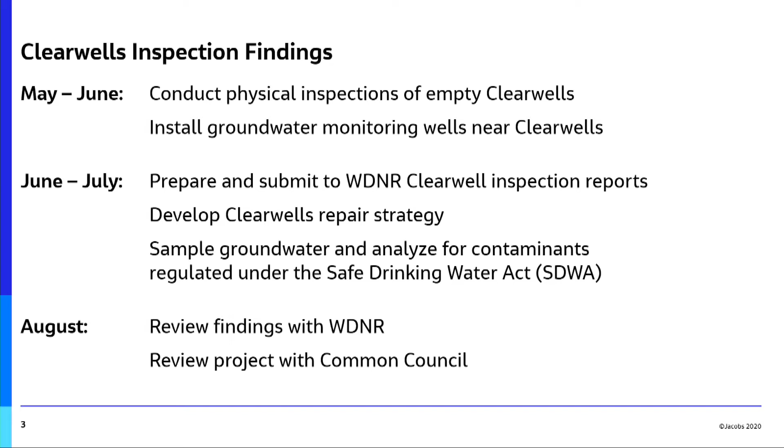So in the early summer, spring, we were conducting those inspections and installing groundwater monitoring wells near the Clearwell. In June and July, we submitted the inspection reports, and we collaborated with Dixon on what would be feasible repair strategies and rehabilitation approaches for the Clearwells to extend their service life. The water utility staff at the treatment plant collected groundwater samples and had them analyzed for many compounds that are regulated under the Safe Drinking Water Act. And then in August, earlier this month, we reviewed those findings with the DNR, and we're here with you this evening.

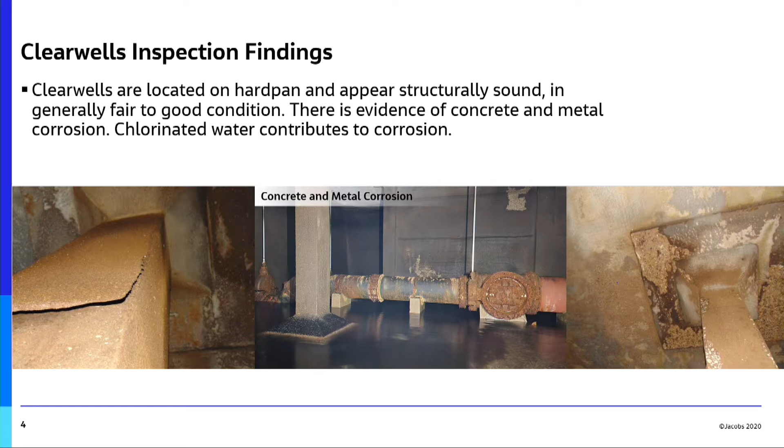So, Clearwell inspection findings. The Clearwells, as you know, are partially buried water storage tanks. They were constructed on a rock-like formation, commonly referred to as hardpan in town, and that provides a very good structural foundation for these tanks, and is probably one of the reasons why they are in fair to good shape, even the really old structures. These photographs show the kind of corrosion that is evident on the concrete and metal surfaces in the Clearwell. This kind of corrosion is not uncommon when these materials are exposed for many years to chlorinated water.

Previously, plant staff guess it might have been somewhere around the 1960s, the Clearwells were relined with a material called shotcrete, which is a cementitious lining. A lot of that lining is in poor condition. Parts of it have fallen away and been removed. Parts still remaining on surfaces are damp in areas, which indicates there are cracks or leaks that could be masked behind that lining. So we put together cost estimates to remove this material and repair these cracks, but had to make an expert guess on what would be involved, because not every surface was available for us to inspect.

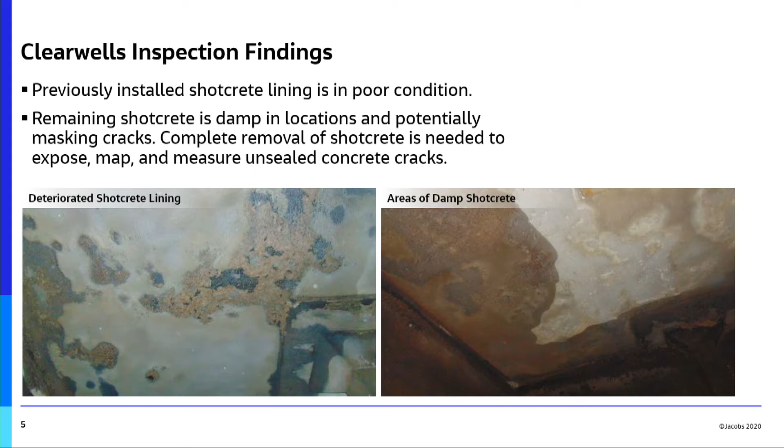Some of the concrete surfaces are soft, a little spongy in nature. That too is not unusual for concrete tanks that have stored chlorinated water for a long time. It's not an appropriate material to build upon, so we would have to remove that before we put any kind of repair lining on. The water storage tanks have pipelines that convey water into and out of the tanks, and these wall pipe penetrations leak, some more actively than others. The photograph on the lower right shows a wall pipe penetration that has been previously repaired. That lighter color concrete indicates where the wall had been cut away and the wall pipe replaced. At this location, there was an active water leak.

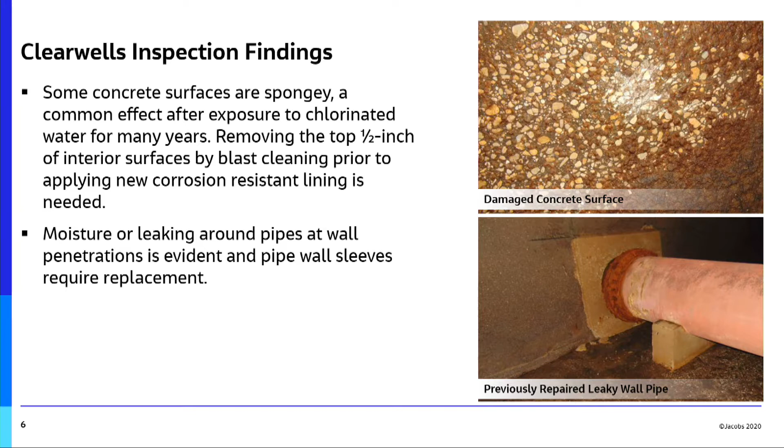There were active leaks visible, photographed, videoed in both the north and center clear wells. And as a result of these detected active leaks, the city has changed how they're operating the clear wells so that the surface water elevation of the stored drinking water is always above the water table.

And what that means is there is a positive head, a higher potential energy, so that if water is going to flow through a crack in these walls, it's going to flow from the inside of the tank to the outside of the tank. As opposed to when they were empty, like these photographs, there was no pressure keeping that groundwater back, and the groundwater flowed in these locations.

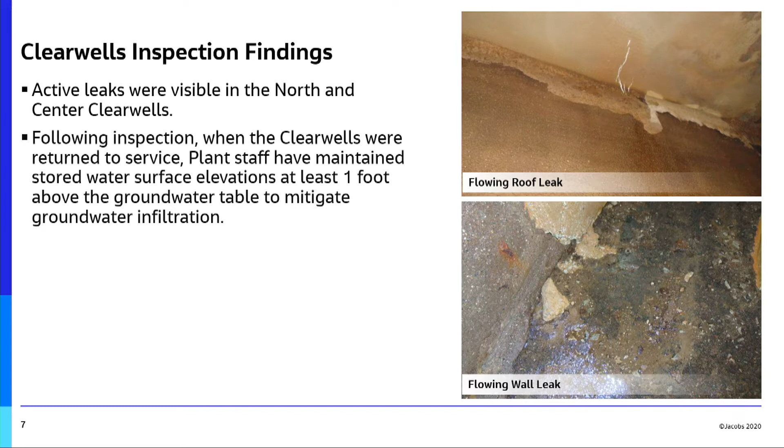All right, in the spring, with the help of AECOM, there were 2 groundwater sampling wells installed at the filter plant site, one east of the clear wells, one west of the clear wells. They were installed of all PFAS-free materials of construction. And this summer, 3 rounds of samples were collected for over 170 Safe Drinking Water Act regulated contaminants. These included microorganisms, disinfectants, chemicals, organic and inorganic, radionuclides, PFAS compounds, and other water quality parameters.

Of the PFAS results, there were 20 different compounds measured, and the majority, like 90% of the results for PFAS in the groundwater next to the clear wells, not in the drinking water, but in the groundwater, about 90% of those results are below the detection limit. So the sample result comes back ND, non-detect.

And then for about 10% of the compounds tested, there were results that came back with brackets around them, very, very low numbers. The brackets were a way for the laboratory to communicate that they had uncertainty about the measurements. They thought the parameter was there above the non-detect level, but below what the laboratory professionals call the level of quantitation. So they reported a number extremely low, a lot of uncertainty. So not a contaminant of concern in the groundwater at this location based on 3 rounds of samples.

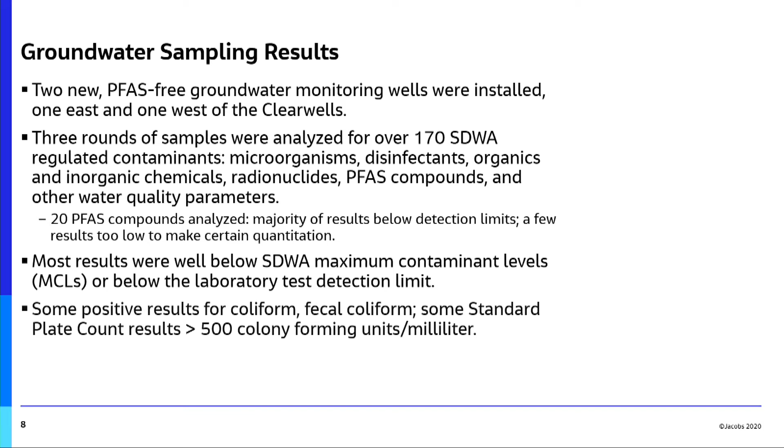Okay, so we collected all of this information and met with DNR. And this slide is one that I've reviewed with DNR to confirm that we are expressing their guidance accurately. So, a buried clear well is a buried water storage tank that's located below the groundwater table and below the floodplain. And if your buried clear well is watertight, it still does not comply with NR 811.

So, if a buried clear well is watertight, how the DNR will respond is they will permit operation of a non-compliant tank as long as the operators of that tank undertake additional safeguards. One thing they specifically mentioned was frequent inspections, dry clear well inspections.

Real quick, is ours considered watertight? No. Didn't think so. Active leaks, no. Before the Oshkosh clear well test was done, there could have been, I assume. She's not going that far. As Linda works down the table, our situation falls under the last row. Linda is just kind of describing the various opportunities, but we fall under the last row right now.

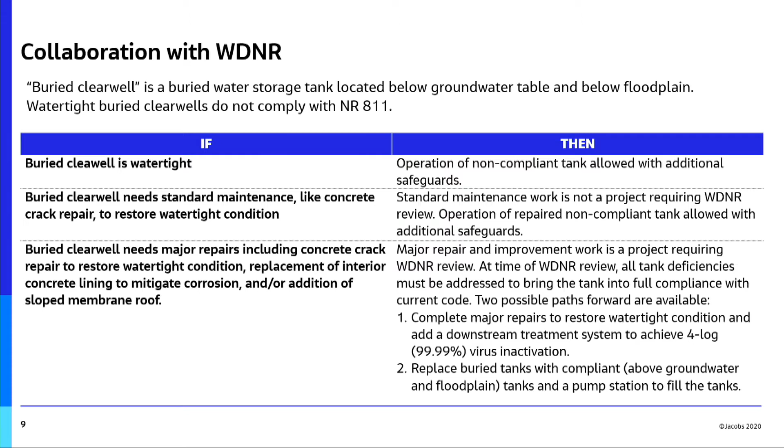Thank you. There's more to come with that. The other part of that question, that's a loaded question, even as basic as it was, because as Linda will show you, there's more to it than just can it be done, but at what cost? Okay, so moving on, we're going to have 2 or 3 slides talking about what does repair and rehabilitate the clear wells mean, what would that project look like with the additional treatment barrier, and then we'll touch back on what were our project options last fall and in the winter with at-grade reservoirs and pump stations.

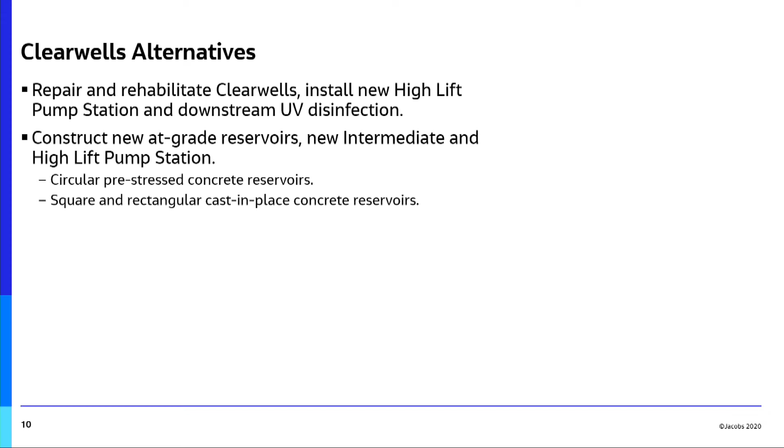So, to repair and rehabilitate the clear wells and meet several of the current deficiencies, the interior surfaces would be blast cleaned so that the surfaces could be relined with shotcrete. The wall pipe penetrations would need to be repaired or replaced to restore water tightness. And clear well overflow pipes need to be added to each clear well to permit the free discharge of overflowing water from the storage tank. Your other storage tanks in the city, your water towers, for example, all have overflow pipes.

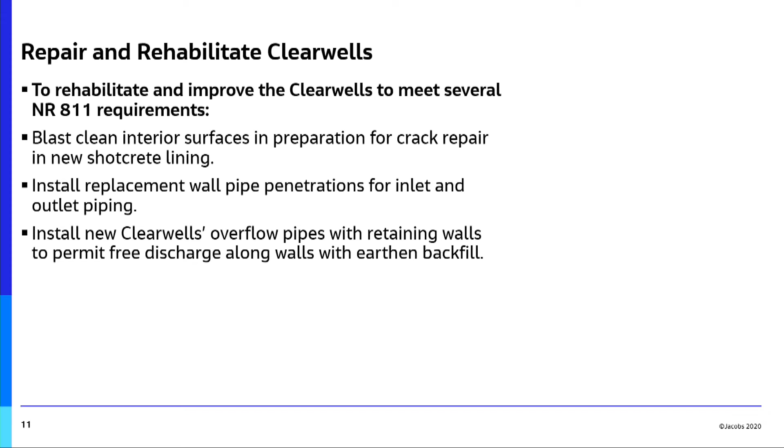So once the surfaces are cleaned, cracks can be repaired through the injection of chemical grout, unless it's a major leak, in which case there are temporary drains that can be installed to route that drain flow to a temporary sump to create dry conditions to complete the repairs in the clear wells and do the relining, and make sure that the environmental conditions are appropriate for successful completion of this work.

We already touched on cleaning and shotcrete. The earthen cover would be removed from the top of the clear well. So there's about 6 inches of soil and sod up on top of the clear wells today. That would be removed, and a new sloped membrane roof would be installed. And with that new roof, personnel access hatches and code-required security tank vents would need to be reinstalled.

And in the clear wells now, there aren't interior baffles that make the water flow in a serpentine path. Because of that, the clear wells can experience hydraulic short circuiting, which means that the new water could cut in line and leave the Clearwell before the older water. So all of the new storage tanks, including the CT backwash supply basin that's on site, and the at-grade reservoir designs that we've talked about before, all include baffle walls so that the first water into the storage tank is the first water out. Fresh water is really important because as water age increases, water quality diminishes. So interior baffle walls would be added to the Clearwells.

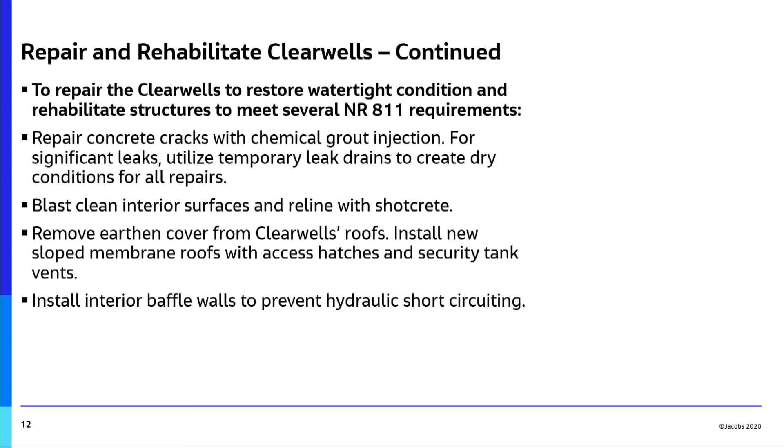Okay, so you might say, well, if we extend the service life of our Clearwells, could we extend the service life of our high-lift pump station? There's a high-lift pump station that was constructed in 1985, so it's coming up on 40 years old. And that pump station does not have the type of pump drives that are needed. They're constant speed drives, they're not adjustable.

So the high-lift pumping requirements, the functionality of having adjustable frequency drives, of having enough space to install flow meters so they can give very accurate measurements, are not things that can be done within the 1985 pump station, and there isn't space next to that station to expand it.

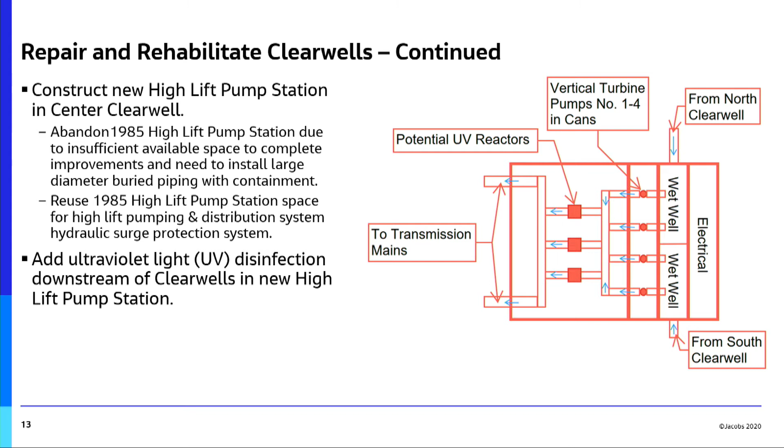And then, as we talked about, we would be adding UV disinfection downstream of the Clearwells. How far downstream would that be? Right there in that footprint, it's like 85 by 60, so it'd be all in the same big building. It's still within the site, not literally downstream? No, it would have to be on the site before the water leaves the filtration plant site. Correct, before the first customer.

So, advantages of extending the service life of Clearwells is that you maintain similar visual impacts, although at center Clearwell, there'll be a big pump station and UV disinfection facility. And another advantage is you don't have to construct and operate and maintain an intermediate pumping system to fill the tanks. They can fill by gravity. The disadvantages are the city needs to construct, operate, and maintain a new treatment system to achieve 99.99% virus inactivation.

Another disadvantage is, although we have the technologies and tools to do concrete crack repair and reline existing structures, we're still going to be repairing 120-year-old concrete. So there's just some inherent risk. It's not the same as new. So we should be mindful of that, and the fact that at some point in the relatively near future, there's going to be more cracks to repair. And so there's future investment.

Do some of the circumstances or situations that impact that have to do with the extreme difference in cold and heat and some of our fluctuations, like we see with roads? Oh, I don't think as much. In the concrete industry, it's well known. Concrete cracks. That's just the nature of concrete. In the case of the roads, you're right. When you get the extreme heat, it causes the concrete to expand a lot, and that causes a buckle and an upheaval. In this particular case, you're not seeing that as much as you're seeing cracks, but you're in a situation where there is a constant ability for chlorinated water to be moving in those cracks to exacerbate those cracks.

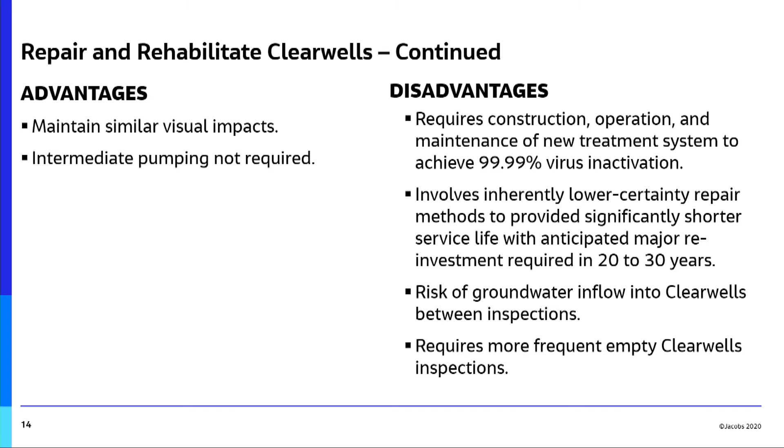Okay, so with this, another disadvantage is risk of groundwater getting into these clearwells. Even after we make them watertight, there's no guarantees. And we'll need to do more frequent inspections.

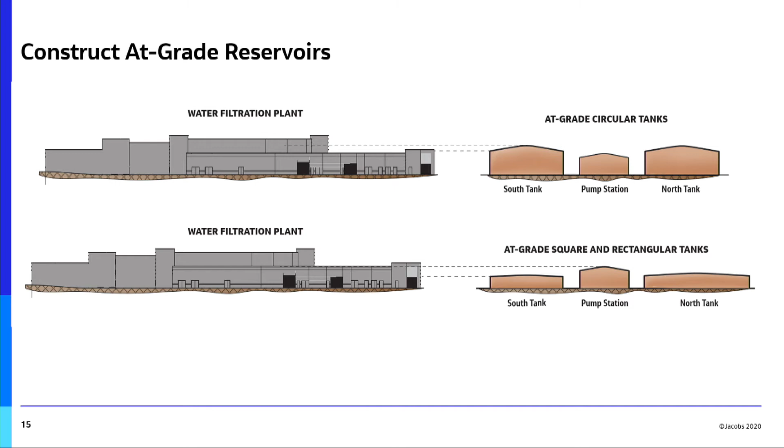So advantages of the at-grade reservoirs: we've got our drinking water out of where it can be contaminated by groundwater or flood. This type of water storage strategy complies with all the current regulations and aligns with the drinking water industry best practices. It involves conventional, lower-risk construction methods, with circular pre-stressed concrete providing the lowest risk, lower than square cast-in-place or rectangular cast-in-place concrete. And the result is there are facilities that the city can readily access and maintain when repairs are needed.

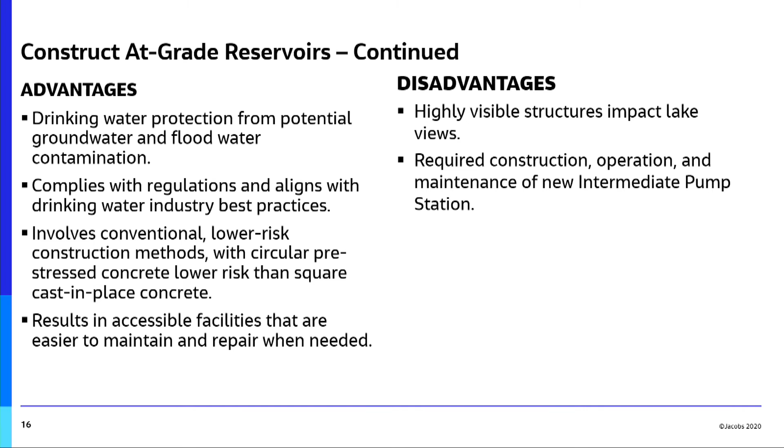The disadvantages are these structures are visible, highly visible, and impact views of the lake. And they require construction, operation, and maintenance of an intermediate pump station to fill the tanks.

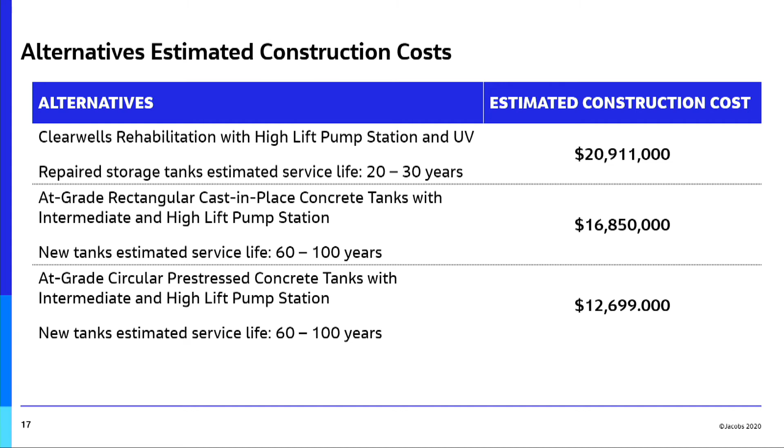And then you may remember there was a meeting in either February or March this year where we had a paper handout that compared the alternatives' life cycle cost. And at that time, the third column of extend existing clearwell service life was kind of a guess because we hadn't done all of these inspections and investigations. In fact, I think the last time we shared this table with Common Council, we had a range of numbers because we really didn't know what was there. So the first two columns haven't changed since March.

So looking out 20 years, the cost of owning these assets, making these decisions, is not only a construction cost, but the cost of annual operation and maintenance. And we're comparing 16 for the pre-stressed concrete circular tanks with 20 for the square and rectangular tanks, with 26 million for extending the service life of the clearwells. So this would include, like, the frequent inspections that would be needed?

Yeah. Big difference here being that for that third column, 20-year service life is the end of its life. That was a great point. I was just about to make a point. Look at the second row of numbers on that table, the estimated service life for the storage tanks. Correct, thank you, Linda. The pumps and mechanical equipment would have a longer service life, but just the storage tanks, we would expect that there would be another capital project in that 20 to 30 year horizon where there would be cracks and maybe wall pipe penetration leaks or something similar to address.

It's almost the reverse of where we were at a few months back in terms of the expectation of the cost for replacing the tanks versus extending. I think extending the life was always anticipated to be a higher cost, but like Linda said, we had a much bigger range on it because we didn't know what we didn't know. And Linda, to add to that point, in that 20-ish year time frame, we could have another major rehabilitation project, or it could be to the point where they can't be rehabbed anymore, and then we have to do one of the other two options at that point.

So that estimated service life is a very important one to keep in mind as we continue to look at this project. And at which point, the lift station in the middle would need to be reconfigured as well. So we'd be taking advantage of the life cycle of that high lift station put in the middle of the existing ones. So is it reasonable to assume that 20 years down the line, if we are taking the rehab option, that would be more expensive than reconstruction again? Yes. Okay.

When you're looking out over that longer horizon, one of the things that the PSC has been trying to make sure water utilities do is don't look out too far, because we don't want customers today paying for capacity that they're not going to use in year 30, which is kind of a different approach, but they're trying to make sure that ratepayers today are paying for benefits that they will realize, that they will enjoy.

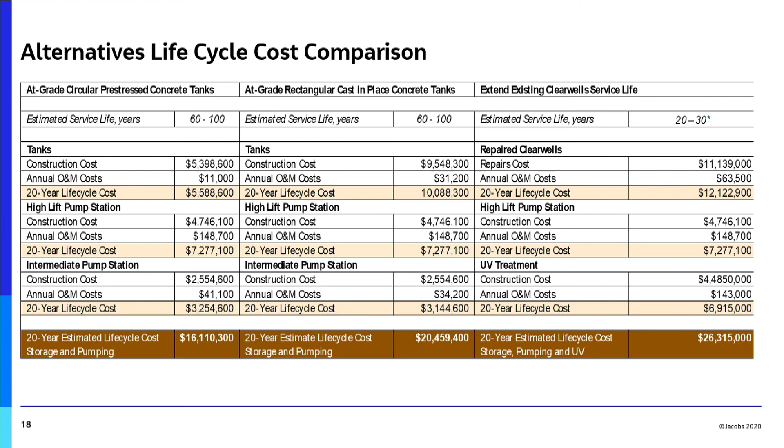And then last slide. So what are we focused on right now? You may recall that in 2021, we combined the ozone equipment replacement project with the Clearwells project because these projects were on a parallel path in the city's capital improvement plan, and we didn't want contractors getting in each other's way. In the last 6 months, concerns about the reliability of the ozone equipment remain elevated. So the Water Utility and Department of Public Works propose to move that straightforward equipment replacement project, which is equipment inside the building and will not visually impact the community, separately from the Clearwells project.

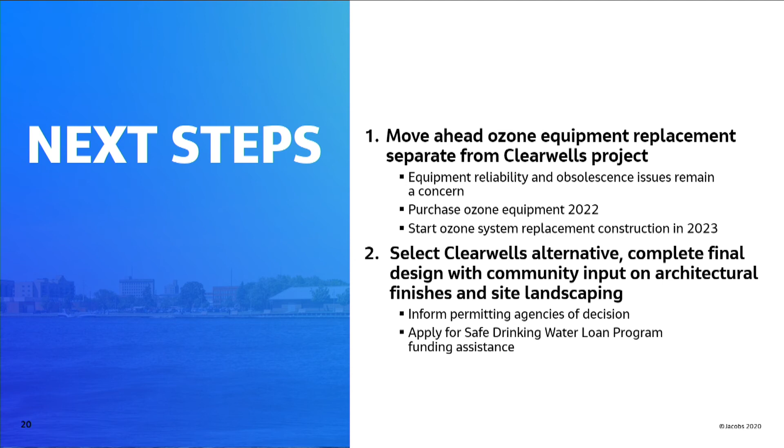October of this year? Correct. It's an annual program, so for construction projects there's an October 31 deadline every year to get into the next year's program. How much assistance has historically been available through that? It's not so much that they're providing assistance; those dollars are usually at a little bit lower rate than bonds. It's a program available to communities to have below market financing. So the savings are in the interest rates. Okay. And because it's safe drinking water, it's looked at differently in the bond analyses, because it doesn't have to comply with the rate covenants of bonds. So it's borrowing from a different source with different rules and strings attached.

Not a grant, though. It's a borrowing. Yes, just a different kind of borrowing. But I gotta say, DNR at every meeting that I attend is talking about the availability of more principal forgiveness, which is grant money, through the bipartisan infrastructure law. Oh, okay. That's what I thought I had read about, some forgiveness.

Linda, one more. Oh, go ahead. Well, I was gonna ask you, Mark. So we have these three different cost options, and presumably the more expensive options we're paying for through increases in rates. Yes, absolutely. So what you're doing is, for $6 to $10 million, you rent a view for another 20 to 30 years. Got it. I don't know how to more bluntly state it. It should be blunt. They're not saying no. It's just that here's the price for it.